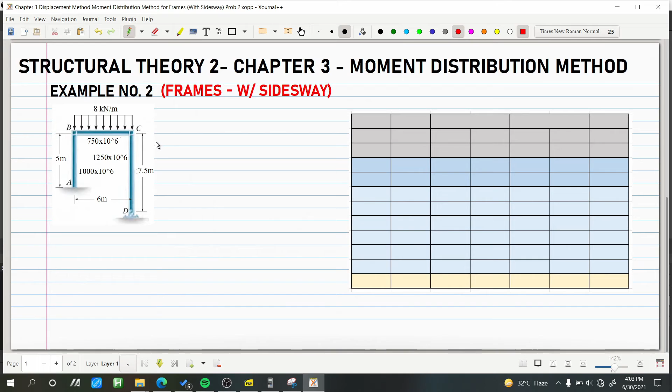Yan. So, DH. Okay? Wala nang space. So, dito natin lagay. Okay? So, ito yung para sa AB. B and A. Then, this is 5 meters. Then, this is AH to the right. Then, this is counterclockwise. Okay? Wait lang. Clockwise pala, sorry. Clockwise.

Summation of moment at B is equals to 0. Clockwise is positive. So, negative AH kasi counterclockwise multiplied by 5 plus AB. Ang AB natin is 9.58 plus BA 19.34. Then equals to 0. So, ang AH natin ngayon is 9.58 plus 19.34, then divided by 5. So, 5.784 kilonewton. So, to the right. Okay?

Yan. Next, para naman dun sa D o sa DH. So, this is pin. Then, this is fixed. So, this is C, D, and this is 7.5 meters. Then, yung ating moment sa C is counterclockwise. So, yung ating DH dapat iikot ng clockwise. So, this is DH. So, summation of moment at C is equals to 0.

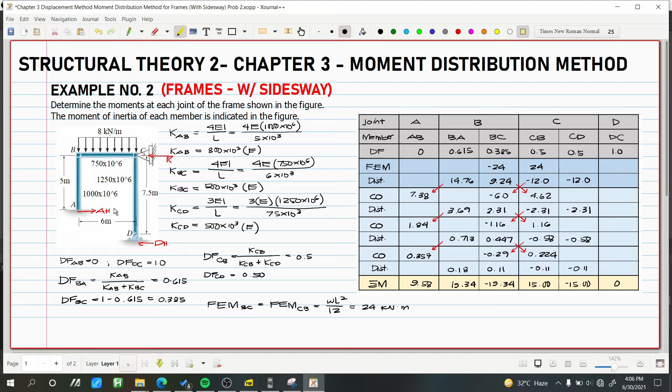Okay? So, by summation of forces horizontal, mas malakas yung AH, no? Okay, so tama lang na ang ating R is to the left. So, yung ating R is equivalent to 5.784 minus 2.0. So, ilan ang R natin? 5.784 minus 2. So, 3.784. Okay, so, to the left. So, yan yung ating R.

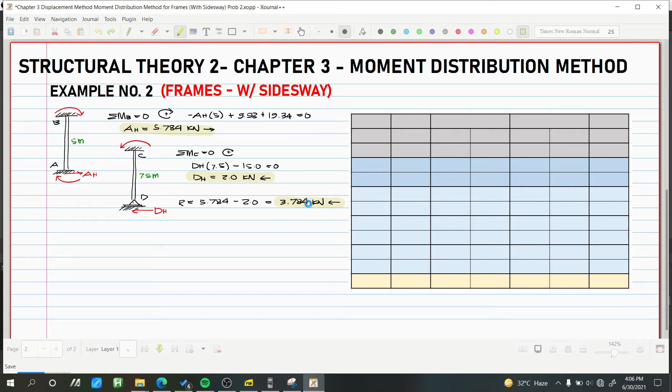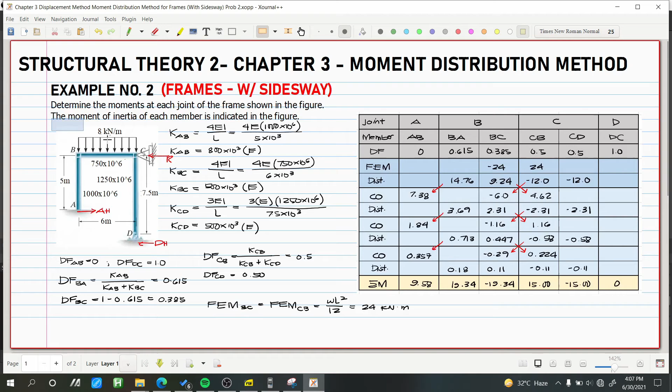So, ngayon, gawin ulit natin yung ginawa natin sa problem number 1. So, copy natin to. Mag-assume ulit tayo ng moment. Then, ito i-release natin yan, hindi ba? So, ito naman yung bagong R natin. Tawagan natin ito as R2. So, ito naman, R1. Then, syempre, kung ganyan na yung ating R2, yung elastic curve ng ating frame is ganito.

So, hindi pa tayo sure dito sa elastic curve dahil hindi pa tayo nakakuha ng mga values. Pero, alam natin na magkakaroon ng side sway. Then, para magkaroon tayo ng linear displacement na delta para sa B and C, kailangan counterclockwise ang ikot ng ating FEM para sa AB and BA. Counterclockwise. Ay, sorry. Clockwise pala yung drawing ko. Ayan. Ganyan.

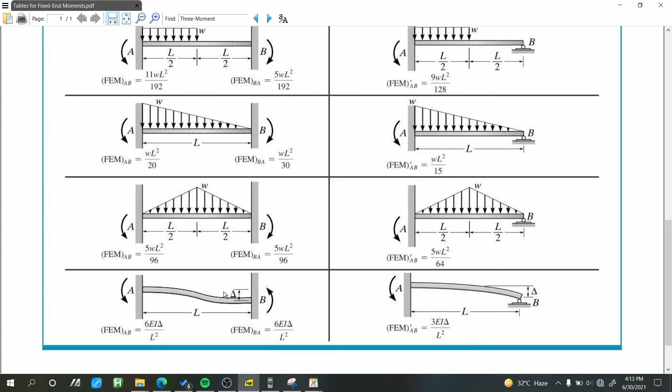Ayan. Okay, so yung ating FEM AB and BA is parehas lang na 6EI delta over L squared kasi meron tayo ditong delta. Okay, so FEM AB and FEM BA is equivalent to 6EI delta over L squared. And yung ating 6EI delta over L squared is equivalent to 100 kilonewton meter. Ayan. So, pwede natin ilabas yung delta, hindi ba? Therefore, ang ating delta is equivalent to 100 multiplied by L squared over 6EI.

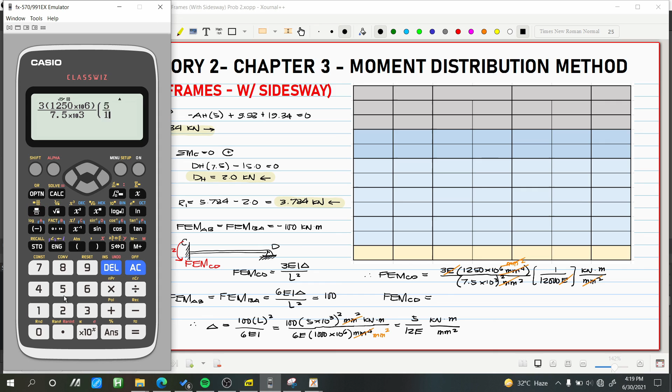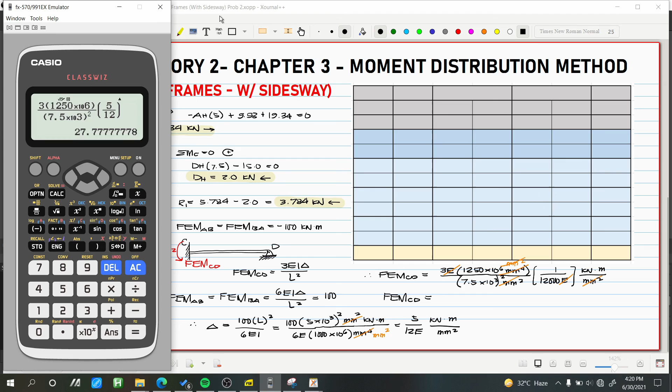So, mangyayari dito, square din to. So, millimeter squared. So, cancel out ulit. So, kilonewton meter pa rin yung makukuha natin. So, this is 5 over 12, naka-square. So, 27.78 kilonewton meter. Okay.